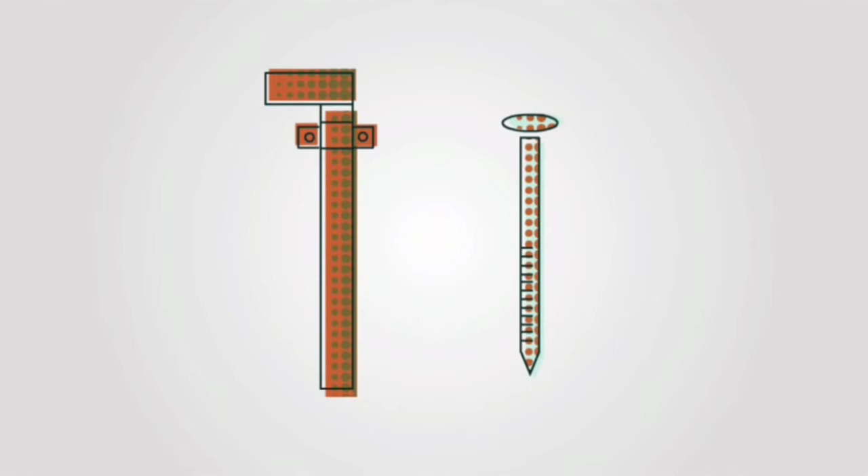Imagine four objects: an aluminum toy, an iron nail, a copper pipe, and a gold ring are left out in the open for many years. Which one will be in the best condition after being rediscovered? If you think that the gold ring is likely to be in the best condition, you're right. The copper pipe and the iron nail will appear in worse condition, but the aluminum toy is also preserved very well.

Most likely, the iron nail will appear in the worst condition. This is because of corrosion.

Corrosion is described as the formation of compounds on the surface of metal when it is exposed to air and water, or an electrolyte like salt water. Typically, once a metal corrodes, it forms compounds known as oxides or hydrated oxides.

The nail, made of iron, rusted. This, by the way, is the only time you should use the term rusting. All other metals are considered to have been corroded when they react with water and oxygen in the air.

But why would the nail be more corroded than the aluminum toy, the copper pipe, or the gold ring? Because metals have different reactivities. Iron corrodes faster because it is more reactive than copper and gold.

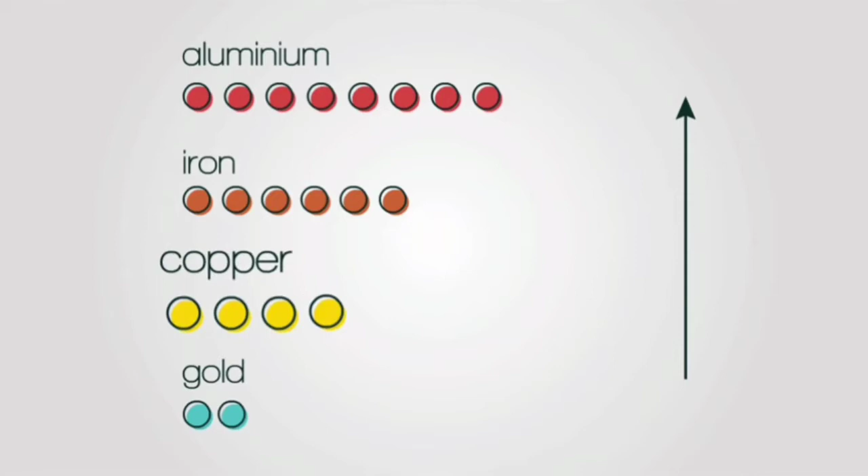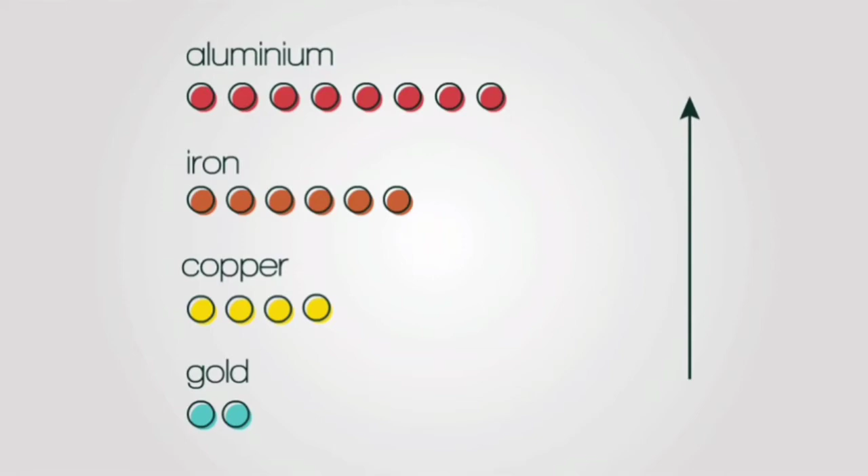But you may be wondering, why didn't the aluminum toy corrode the fastest? The truth is aluminum is more reactive than iron, so it reacts fastest with the oxygen from the air, forming aluminum oxide. Aluminum oxide is very unreactive because once the oxide layer is formed on the surface, it binds very tightly to the surface of the metal, so no cracks can form and cause further corrosion.

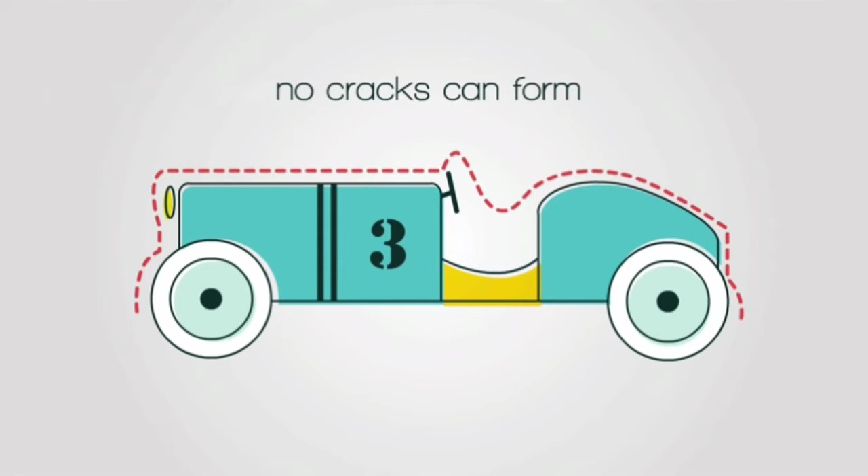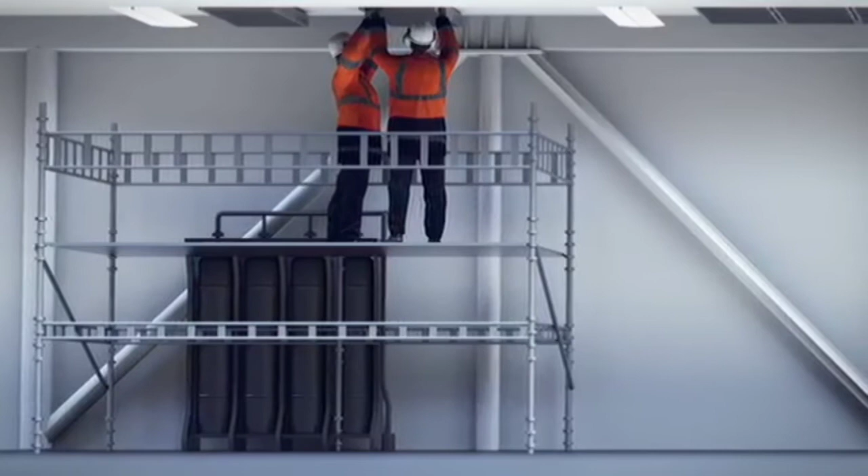Much of the equipment used in the oil industry is bolted in place, often at height, where it is exposed to adverse weather conditions. If we choose the incorrect method of securing the equipment, galvanic corrosion may occur, and the equipment may break down.

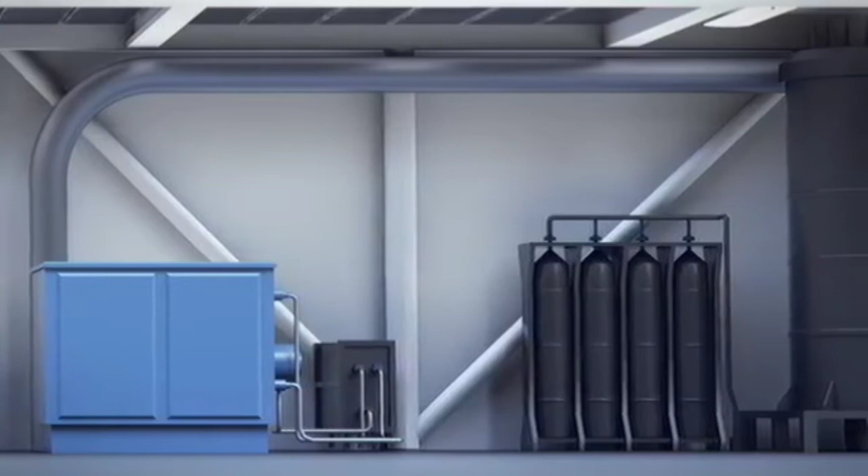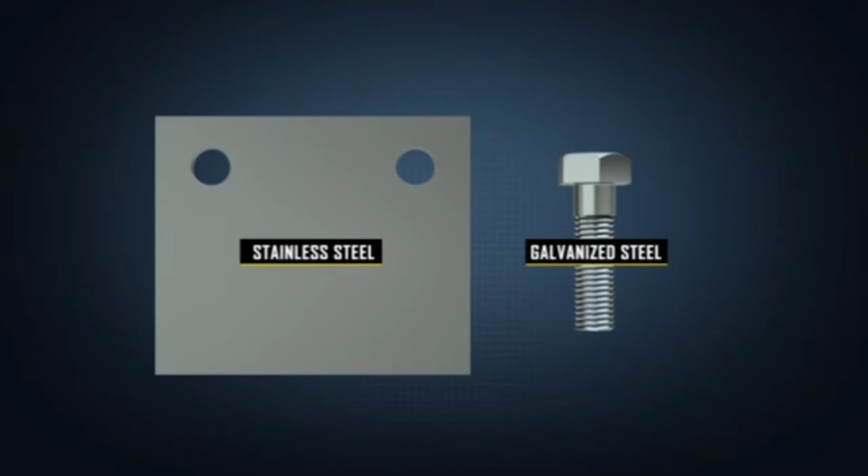So first, what is galvanic corrosion? Galvanic corrosion occurs when two different metals or alloys with different electrochemical potentials come into contact with each other under water or in a damp environment.

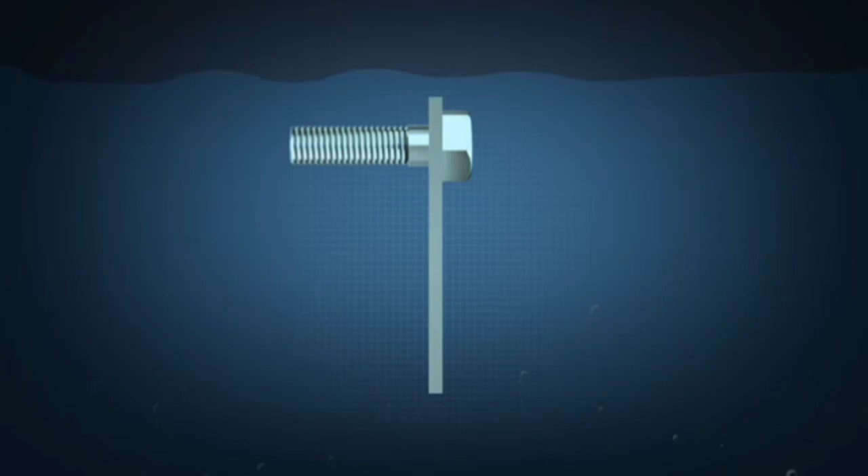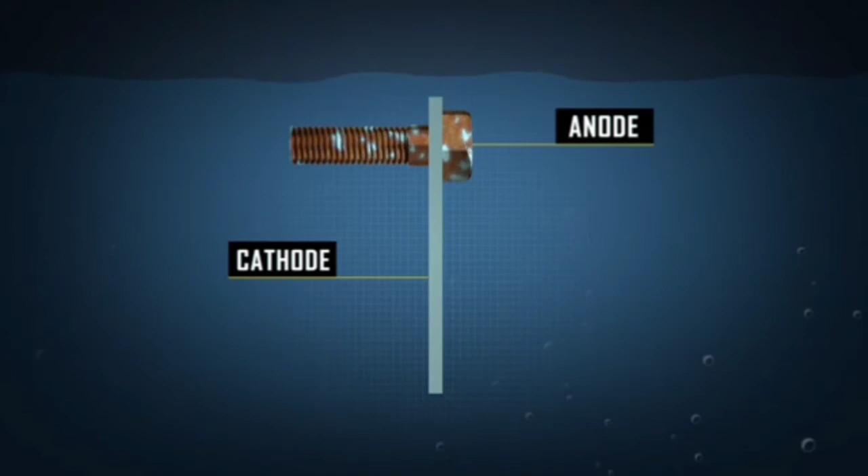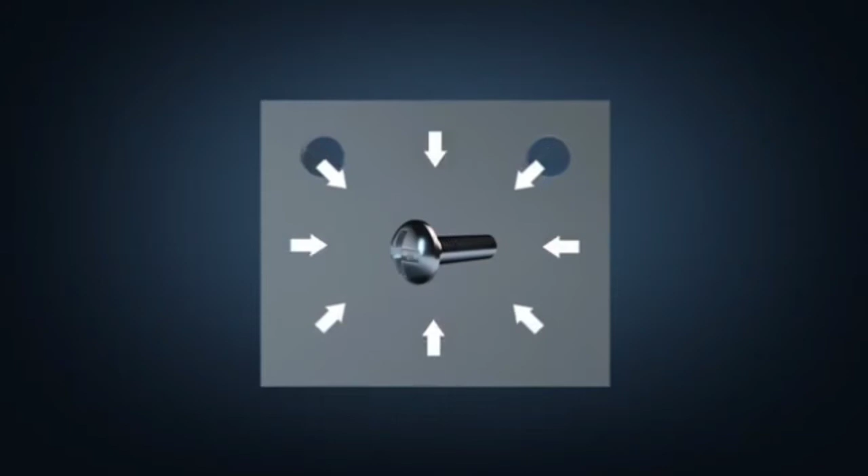In the event of such contact, the less noble metal acts as an anode, and the more noble metal acts as a cathode, for it is always the anode that corrodes. The greater the cathode area in relation to the anode, the faster the anode will corrode. In our example, the screw will corrode quickly, not only because the cathode is larger, but also because the electrochemical potential is greater.

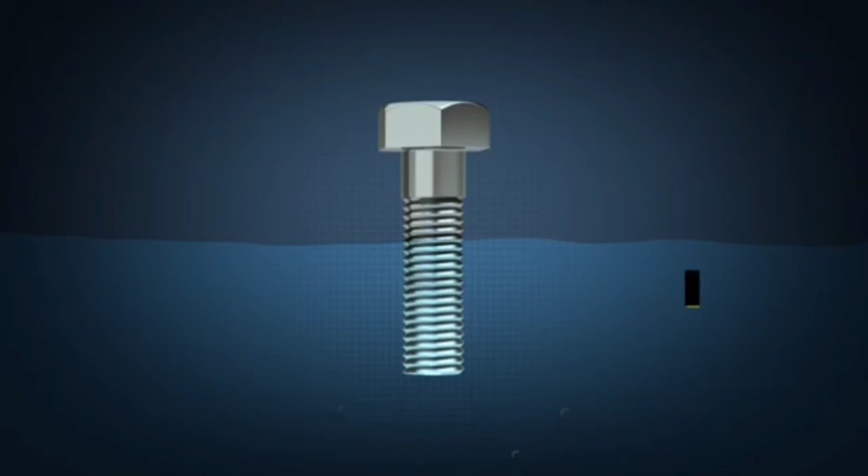Note that galvanic corrosion may also occur between parts of the same metal if the parts are situated in different surroundings, such as areas with different pH values. For this to happen, the anode and cathode must be in electrical contact with each other.

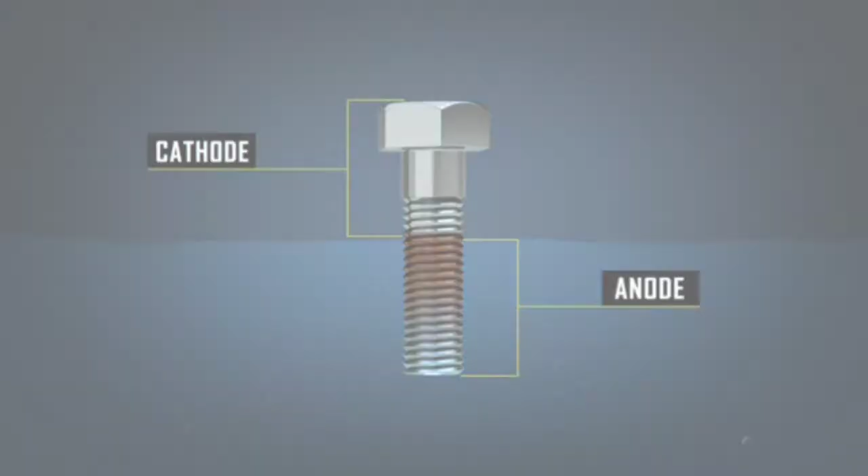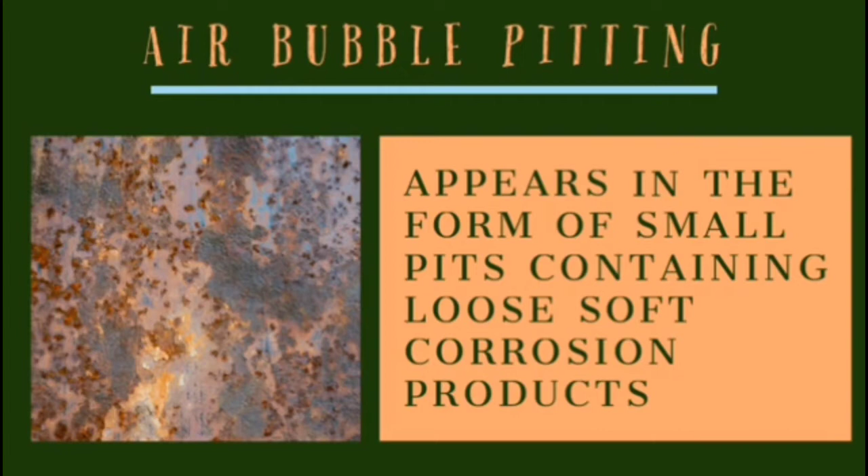There are three forms of pitting corrosion: air bubble pitting, scab pitting, and soft scab pitting. Air bubble pitting appears in the form of small pits containing loose soft corrosion products. These are black iron oxide covered with a layer of red hydrated ferric oxide. It occurs due to electrolytic action and can be found on any surface where air bubbles may collect.

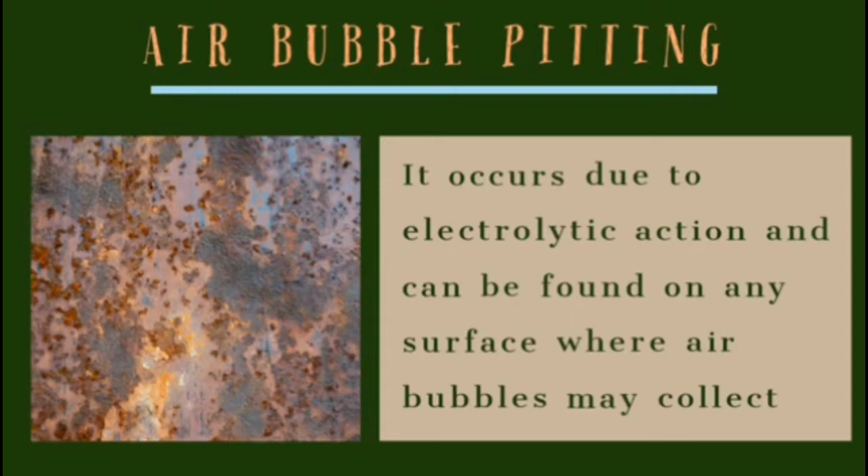Scab pitting is a hard scale of black magnetic iron oxide which cannot be dislodged by a wire brush, usually occurring in hot parts where corrosion products turn into hard scab by heat. It occurs due to partially or untreated impure boiler water containing salts and oxygen.

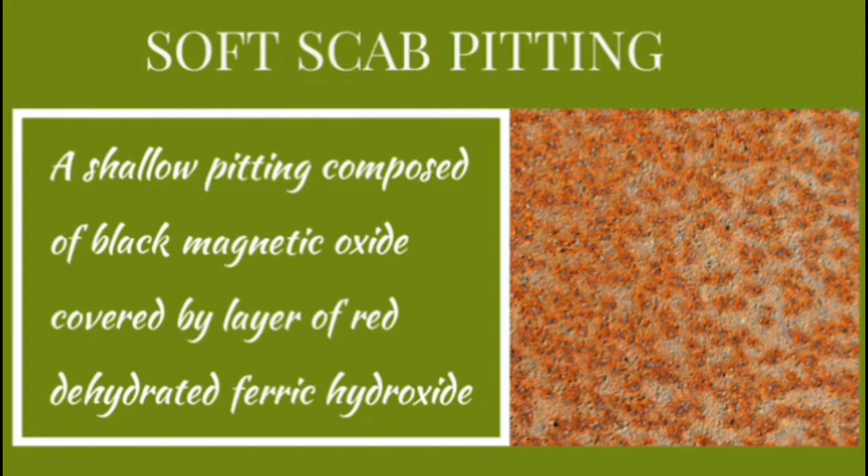Soft scab pitting is shallow pitting composed of black magnetic oxide with a layer of red dehydrated ferric hydroxide. This type of corrosion usually occurs in superheater tubes, headers, and the main steam line. The main reason is deposition of salt due to priming in the superheater and steam mains, followed by condensation.

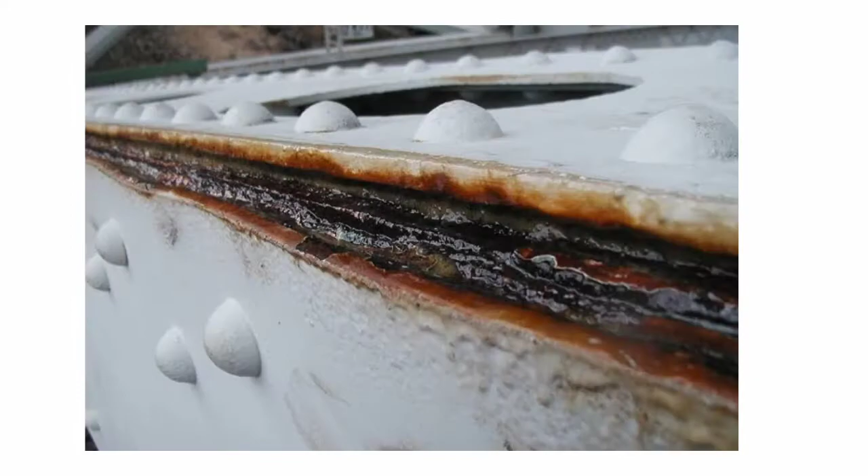High temperature corrosion is one of the issues for material selection, structure design, and service life of an engineering part which is always exposed to high temperature.

The formation of corrosion products such as oxide, which is the common form, carbides, nitrides, and sulfide leads to shortened service lifetime of engineering parts. Usually, a temperature or pressure increase directly leads to a higher corrosion rate because electrochemical reactions generally occur faster at higher temperatures. Temperature increases add energy to the reaction, which increases the corrosion rate.

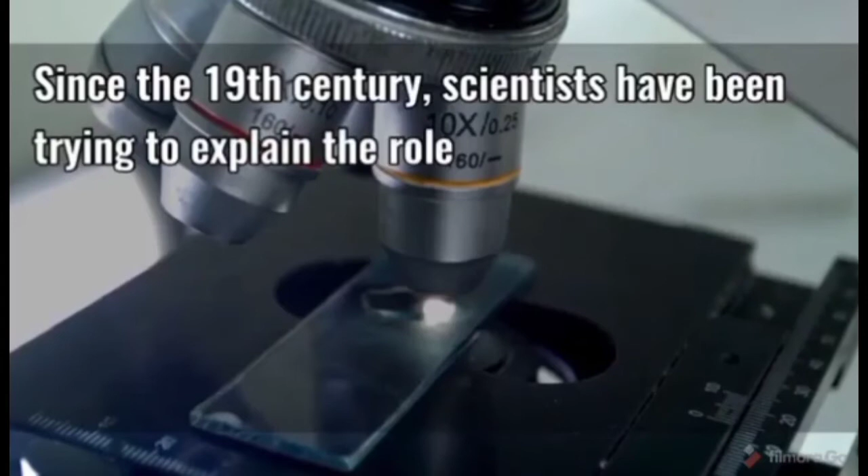Since the 19th century, scientists have been trying to explain the role of microorganisms in corrosion. The damage due to MIC is broken down into a three-step process: creation of biofilm, change of environment at the metal surface, and deterioration of the metal.

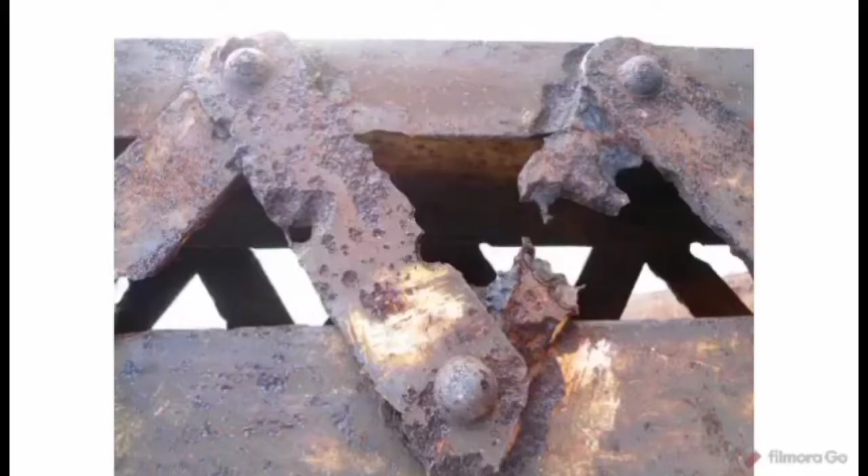The common bacteria associated with MIC are sulfate-reducing bacteria, acid-producing bacteria, and iron-reducing bacteria. The most common forms of corrosion influenced by MIC are pitting corrosion, crevice corrosion, and stress corrosion cracking.

MIC treatment: a very new aspect of treatment will be based on the possibility of using bacteria against bacteria, or more generally speaking, biological treatment of MIC.

Metal dusting is a catastrophic form of corrosion that occurs when susceptible materials are exposed to environments with high carbon activities. In short, it is a corrosion in which the metal is turned to metal powder due to a high concentration of carbon activities.

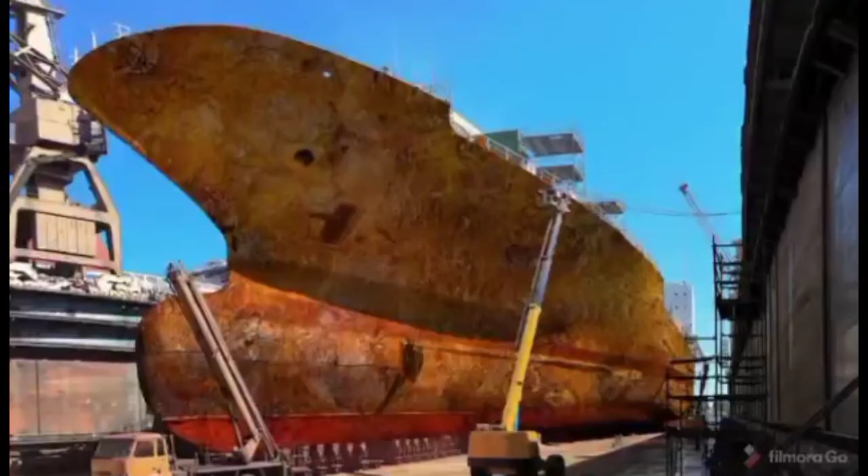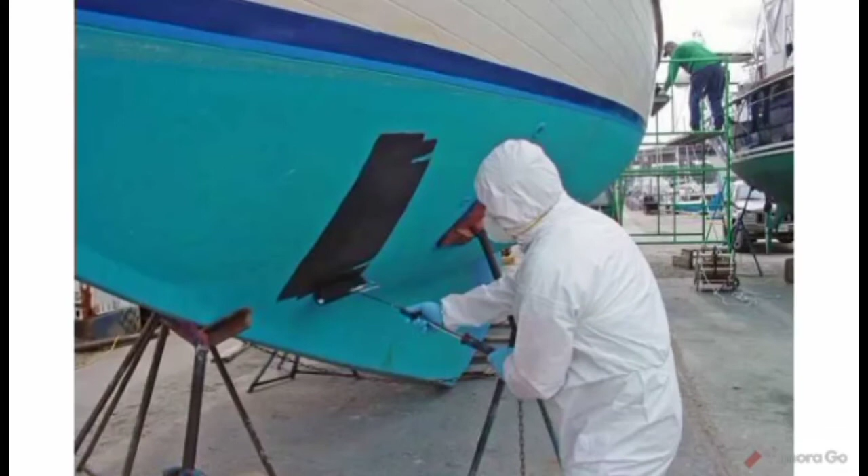Various treatments are used to slow corrosion damage to metallic objects which are always exposed to weather, salt water, acids, or other hostile environments, such as painting the metallic objects in a vessel or coating it with something that can slow the corrosion damage. Our topic for today is surface treatments.

Surface treatments or preparation involve the removal of old paint, oil, scale, or rust before painting or coating application. There are many surface treatment methods that can be used, like dry ice blasting, chemical strippers, lasers, bristle blasting, soda bicarbonate blasting, and lastly, sponge abrasive blasting, with sponges made from abrasive materials.

When surface treatments are used to retard corrosion, great care must be taken to ensure complete coverage without gaps, cracks, or pinhole defects. A small defect can act as an Achilles heel, allowing corrosion to penetrate the interior and causing extensive damage even while the outer protective layer remains apparently intact for a period of time.

The next topic will be applied coatings. After the surface treatments, the next step will be applying coatings such as plating, painting, and the application of enamel, which are the most common corrosion treatments. They work by providing a barrier of corrosion-resistant material between the damaging environment and the structural material.

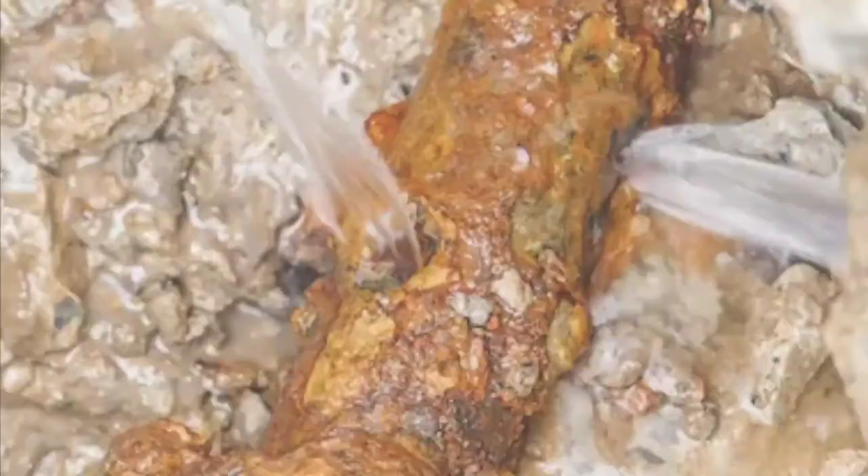Preventing corrosion is very important, especially in the maritime field. That's why we need to learn how to prevent and how to minimize corrosion.